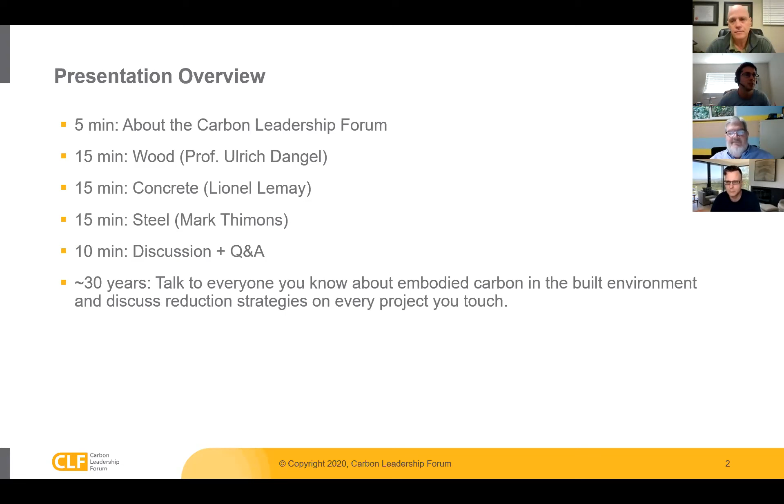About the Carbon Leadership Forum: it was founded about 10 years ago, and it's all about collective action, bringing people together to talk about and address embodied carbon in the built environment. We recognize the impact of buildings is significant. There's research conducted by people in academia and industry, and we develop tools and resources. I'm sure many of you have heard of the EC3 tool - that was an idea incubated in the Carbon Leadership Forum - and we empower collaboration and connect members all around the globe to talk about embodied carbon.

There are local hubs all over the place. Austin is just one of many. I think most people on this call are probably joining from Austin, but those of you who aren't, look for a local hub near you and see if you can get involved and join in.

There's also an online community you can join. If you go to community.carbonleadershipforum.com or .org, there's an online forum where you can ask questions and participate. It's been called kind of the Google search of embodied carbon. There are also a bunch of focus groups. So we have local hubs, an online platform, and focus groups. If there's a particular idea you want to develop or incubate, start getting involved in the Carbon Leadership Forum - this is a great place to start.

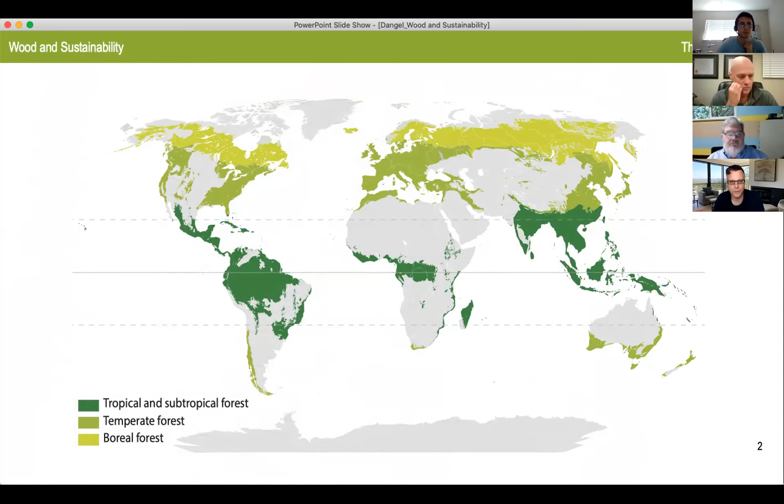Wood itself, or trees themselves, are really amazing things. They take up carbon from the atmosphere and, through sunlight, convert that carbon dioxide and water into carbohydrates for their growth, and simultaneously release oxygen that we all need to breathe and live.

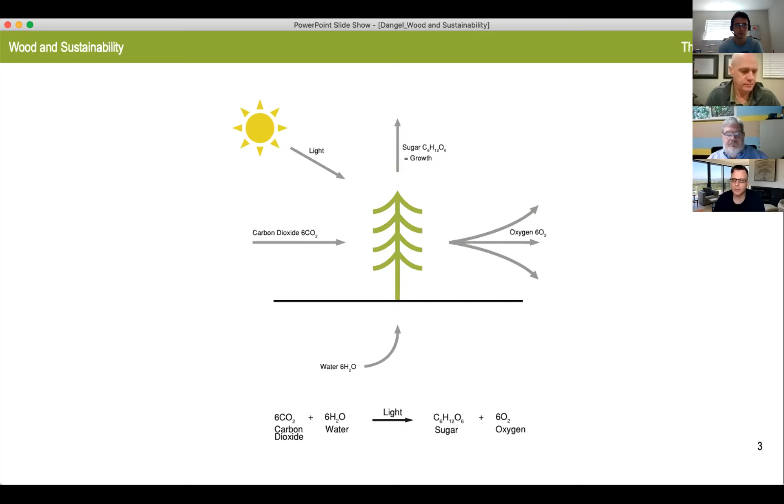You can't have a conversation about wood without talking about deforestation and the concerns around it. If you talk to any layperson, that's the first thing that comes up: aren't you cutting down all the trees?

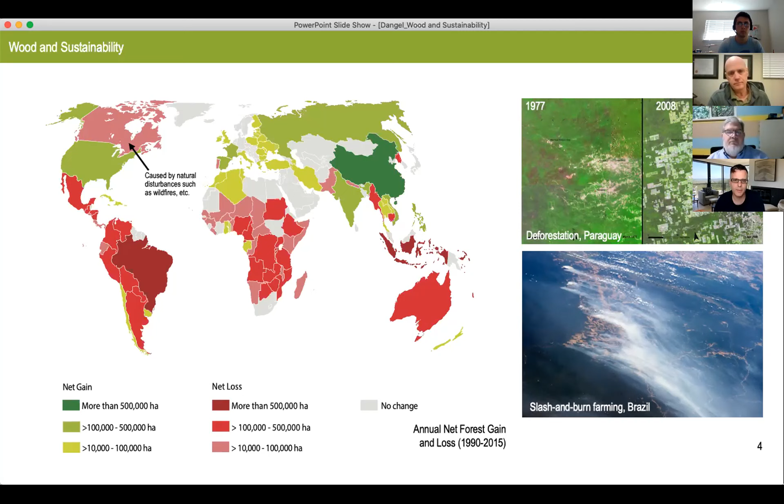So it has to do with other things besides just using wood for construction. That said, we still have to be mindful of where that wood comes from, and I'm an advocate for sourcing materials that come from sustainably managed sources. Wood is the only structural material that has third-party certification programs verifying that the product originates from a responsibly managed source.

In the Northern Hemisphere, Europe has been managing its forests sustainably for over 400 years. In North America, we're probably about 200 years in. Here, about 30% of our forests are certified by FSC or PEFC, and that doesn't even include federally managed forests that are sustainably managed but don't fall into a certification program. So I'm an advocate for using wood, but also for using wood from sustainable sources we can trace.

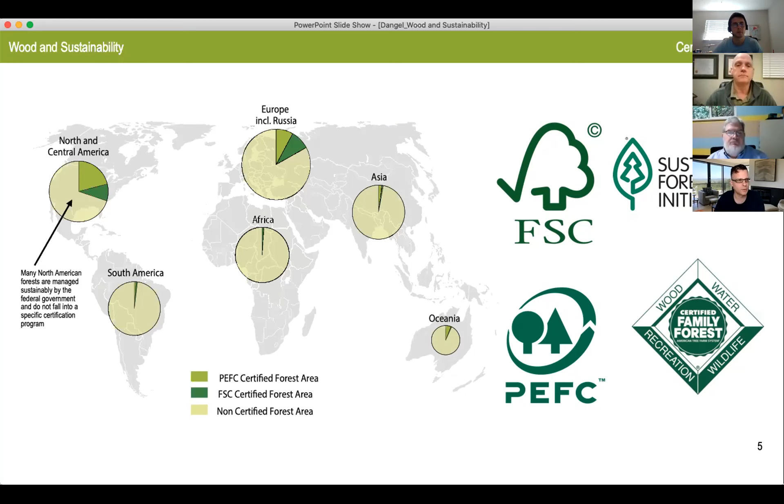Really, the great opportunity for using wood is capturing the atmospheric carbon trees absorb as they grow. As forests mature, that tops out, and older, more mature trees absorb carbon much more slowly. So there's an opportunity to take out the mature growth and allow new growth to follow, then convert that wood—which at that point is 50% carbon—into long-lived wood products that store that carbon, using them to build our buildings and cities, turning our buildings into long-term carbon sinks.

At the end of that building's service life, the wood will only release as much carbon back into the atmosphere as the tree absorbed during its lifetime, whether through incineration or rotting and decay.

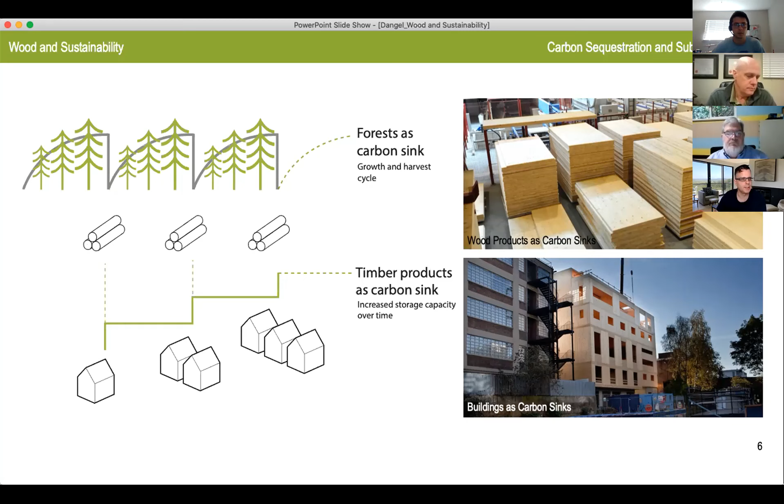The wood industry has been pretty good about efficiently processing wood from the forest. If you look at this chart from the 1940s, roughly half of a trunk was wasted, incinerated, or landfilled. Today, the wood industry effectively uses 99% of the trunk, some in the form of residues used for biofuels to provide their own energy. As long as that comes from sustainably managed forests, that's a carbon-neutral energy source.

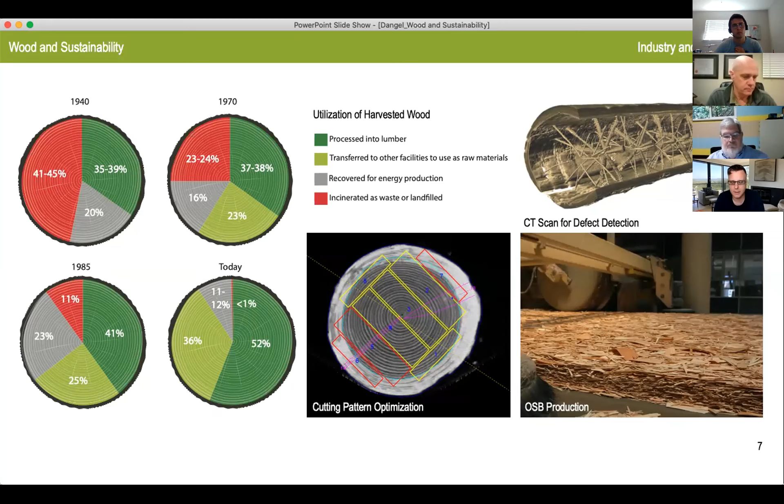Many green building systems increasingly rely on performance-based evaluation of building materials, assemblies, and entire buildings through life cycle assessment, whereas initially wood was more recognized in a prescriptive category. That's where environmental product declarations, or EPDs, have increased in importance, and many rating systems have started to recognize them. EPDs are independently verified reports on the environmental performance of products, based on life cycle assessment, with worldwide validity because they conform to ISO standards.

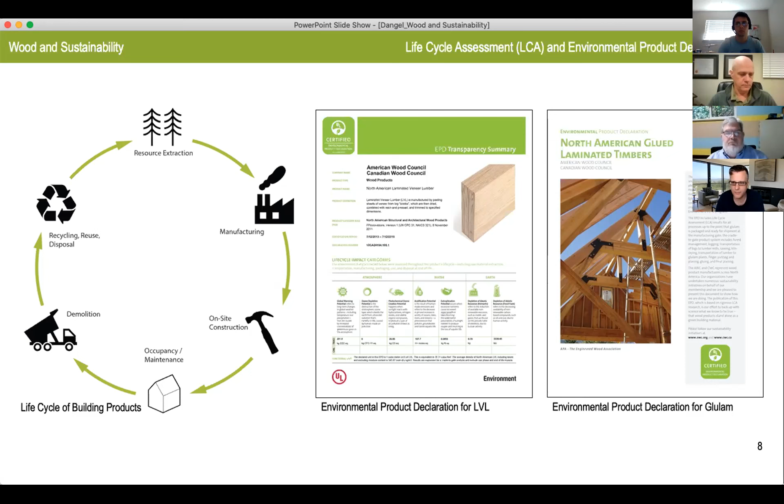So it's like the nutritional label on your food—you can quickly compare different products against each other and see which one you might prefer based on its environmental performance. The wood industry, especially in Europe and Asia, has been the leading developer of EPDs, and the North American wood industry is following in its footsteps.

There are a lot of opportunities that have arisen with new technologies. Digital fabrication offers the ability to manufacture wood in a highly customized fashion without significant loss of productivity. Some of that gets lost in formal explorations, which I'm not a particular fan of. I'm really more interested in using these computer-based design and fabrication processes to resolve issues of material use, waste minimization, and structural efficiency, leading to the overall optimization of a structural system.

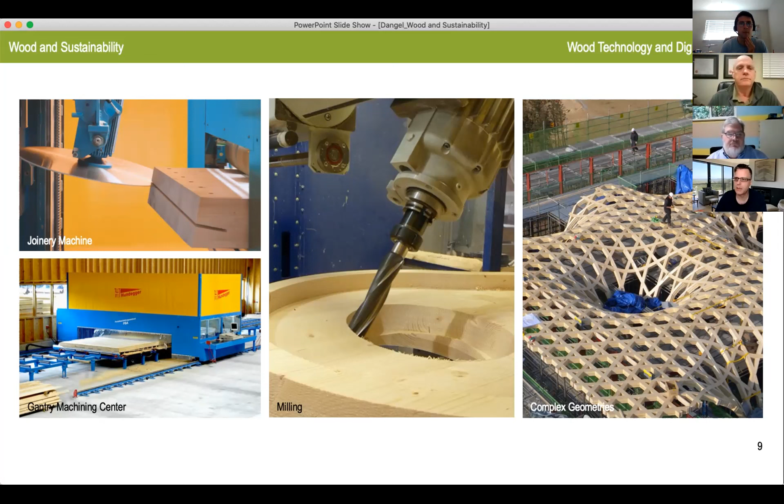Because you're able to create some of these very complex geometries. In the end, it's usually still workers in the field that assemble these in a very labor-intensive process by hand.

Wood also has historically had high levels of prefabrication due to its lightweight. Even going back centuries, carpenters would prefabricate offsite, bring it to the site, and erect structures. That's where the term 'raising a barn' comes from.

Whether that's prefabricated components, entire wall and floor panels, or entire prefabricated spatial modules, prefabrication offers alternatives to conventional building practices, which are often plagued by inclement weather, exceeding budget, chronic delays, and poor quality of construction.

Prefabrication offers the ability for processes to occur simultaneously rather than in a linear fashion. They tend to be less dependent on the weather, and offer dry and safe working conditions, better quality control, and reduced waste on site.

So you're not trucking a lot of raw materials to the site, generating waste that has to be gotten rid of, or landfilled in the worst case. A lot of that waste can be separated and taken care of right there in the workshop.

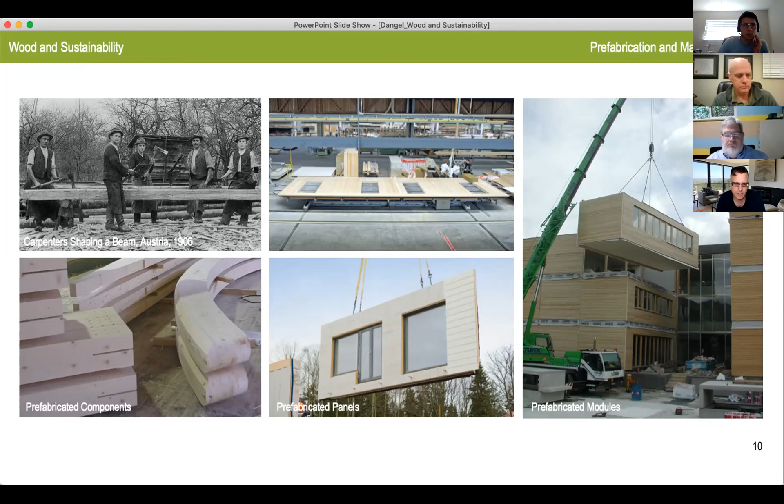Also, reducing the impact on the neighborhoods these buildings are going up in, in terms of noise and interruption, is increasingly relevant. That said, I do like all building materials.

I'm a fan of wood, obviously, but I don't want to use wood simply for the sake of using wood. Let's use it where it makes sense. Wood does play nicely with other materials—even an all-timber building isn't going to get away without using some type of metal connectors.

Let's employ hybrid construction techniques where we can exploit the strength of one material while compensating for the weakness of another, such as using steel for tension and wood for compression, or a concrete podium that keeps the wood dry and allows for larger spans.

Where I see a lot of development happening is in composite systems, where you use two materials together, such as wood-floor concrete systems, taking advantage of concrete's mass for acoustics and fireproofing, and the structural capacities of concrete in compression and wood in tension.

But at the same time, when we look at these composite systems, we have to keep in mind what's going to happen at the end of the service life of these buildings. Like in the top right, you can see this is a...

...mechanical shear connector that connects the precast concrete slab to the wood structure below, ensuring composite action and structural integrity of the system, while also facilitating disassembly at the end of its service life and easy separation into different waste or recycling flows.

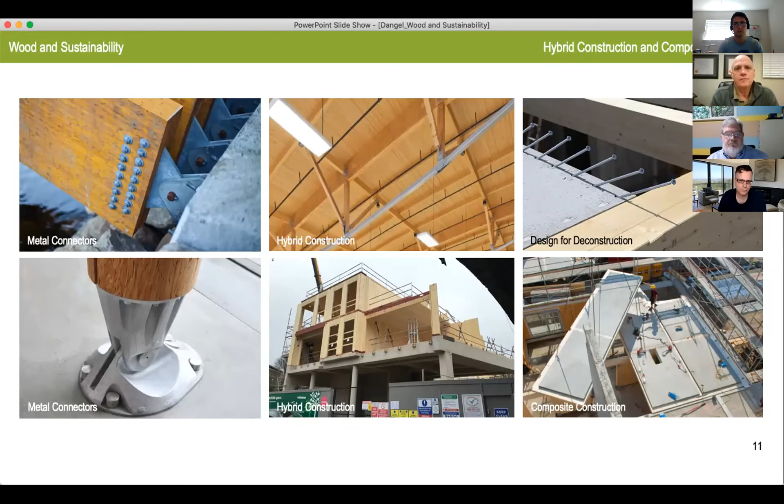We have over half of the world's population living in urban areas now, and by 2050 it's going to be about 70%. Whether in an industrialized nation or an emerging economy, they're all going to have to provide more sustainable and affordable housing.

At the same time, we also need to reduce our carbon footprint. These new mass timber products have the opportunity to build taller and denser, turning our cities into carbon sinks rather than emitters of CO2 emissions.

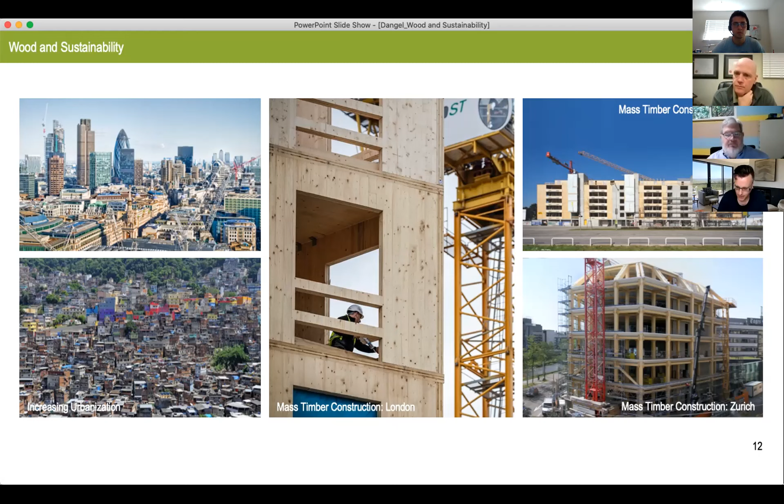Wood is also great for increasing density in these areas, whether that's an infill project minimizing the truckloads of materials that go in, and reducing the noise impact and disruption on the neighborhood.

Also increasingly important in these inner-city environments are fine particulate emissions, which you can reduce with high levels of prefabrication.

Also taking advantage of the significant structural reserves of some of our steel, concrete, and masonry structures through rooftop additions. This example, second to the left, is a two-story 1960s housing development that received a two-story wood addition, effectively more than doubling the livable space.

And taking advantage of the embodied energy of the materials that are already there. Lastly, we also have building stock from the 1950s to the 1980s where the envelope has reached the end of its service life, but the structure is totally fine, and there's no reason to tear them down.

So increasing the thermal properties of the envelope by recladding with highly insulated prefabricated panels—a process that often happens while the buildings are fully occupied—increasing the lifespan of the structure and preserving the embodied energy that went into it over 50 years ago.

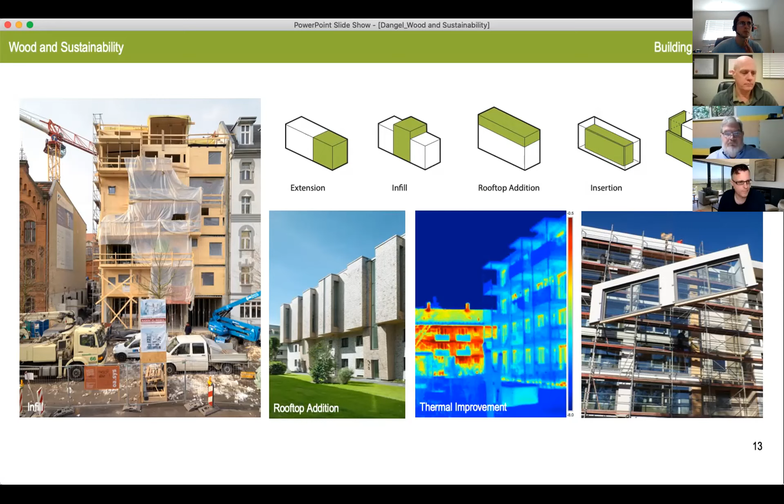Lastly, I want to close with that slide in terms of the potential for wood. I think these mass timber products have opened up manufacturing prospects and added value potential for a lot of rural regions that have abundant timber resources, creating well-paying jobs and connecting them with the urban communities that will actually consume their products.

Also, continued research into all-wood products, reducing the number of metal fasteners or alien materials that might make it hard to repurpose and recycle at end of service life. There's also significant potential in using hardwoods structurally. Virtually all of our wood used in structural applications is softwood, but there's a large number of hardwoods in our forests not being put to higher use.

Then the Achilles heel obviously for the wood industry are the adhesives, which are still heavily reliant on petroleum-based products. But there's a lot of research going on in bio-based adhesives or other forms of bonding technologies such as friction welding. And the steel and concrete industries, over the last 50 or 100 years, have been able to get a good system down that has been standardized, whereas the wood industry, and mass timber specifically, is still really in its infancy.

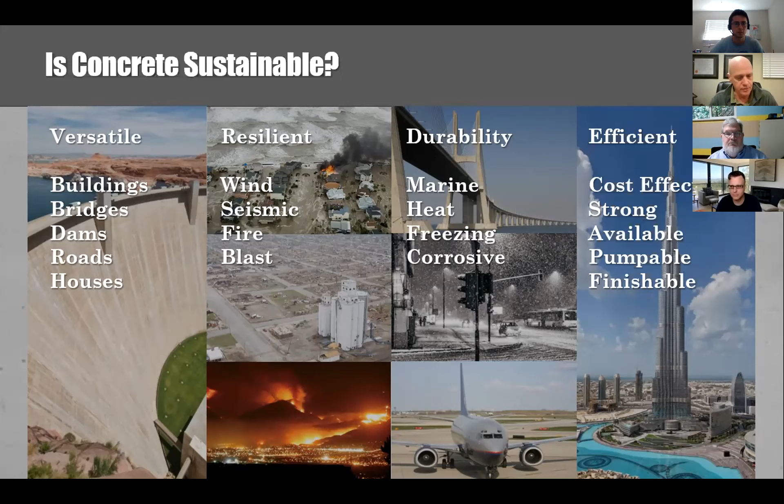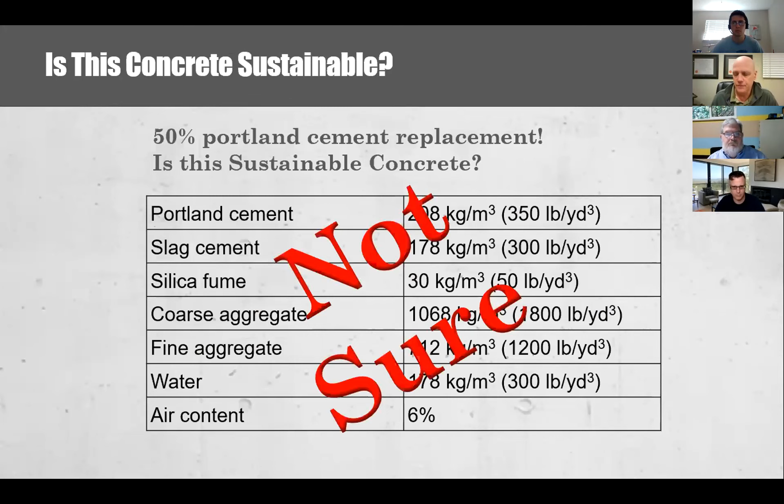But I'm going to suggest that maybe we're not sure, because there are so many applications for concrete, and so many fairly rigorous needs from both the owner side, architect, engineers, and contractor side, that you have to really make sure you understand what the use for that concrete is.

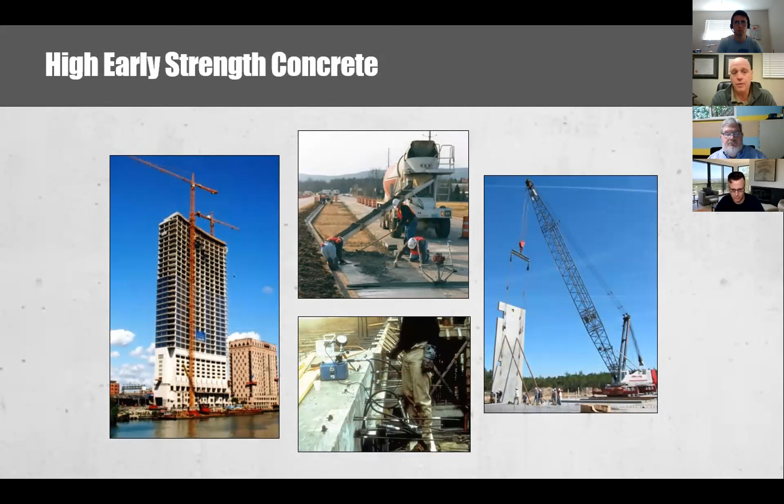So, for example, if you have high early strength concrete, perhaps 50% replacement is too high for that particular application, whether you're turning forms, post-tensioning, trying to open a road very quickly, or lifting tilt-up panels, or whatever the case. So you probably couldn't do it with 50% replacement. You really have to think about it.

When it comes to mass concrete, 50% replacement might not be enough. So you would not have a durable concrete that could control the heat of hydration during the placement of these mass concrete elements. And so that mix design that I showed you, that most people would say is a sustainable mix design, may not be, in fact, meeting all the performance criteria.

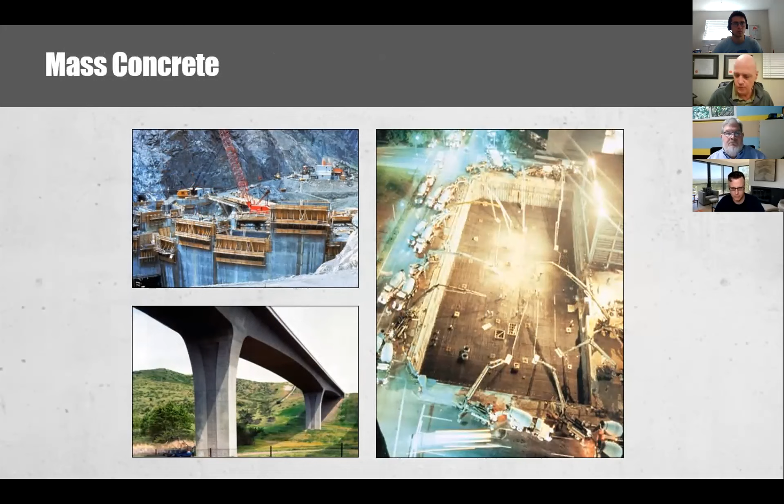The point I'm trying to make is, what's a sustainable structure? Well, it has to meet all the traditional performance requirements of the owner and the design team and contractors. For example, strength, durability, fire resistance. It has to be quiet for buildings. It has to be economical, easy to build. But now, in the last couple of decades, we're now focused also on this additional criteria, which is minimizing carbon footprint. So let me explain how the concrete industry is trying to meet that challenge.

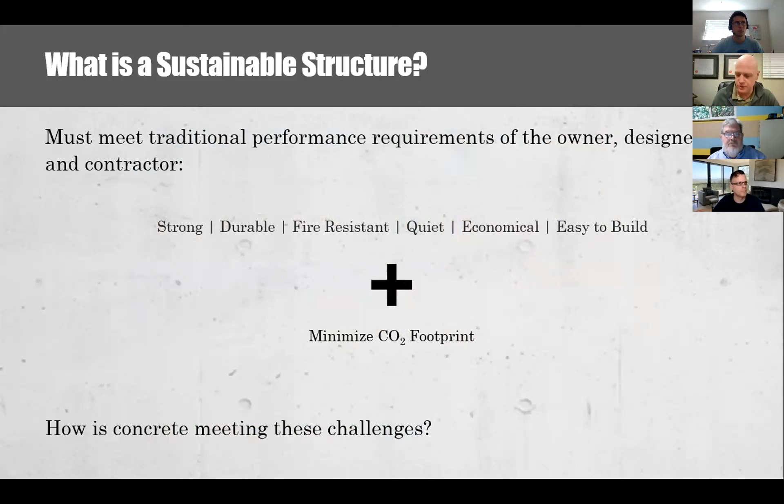Just a few milestones. I would say back in the mid-2000s, not to say that the industry wasn't moving towards more sustainable structures before then, but our association really focused on this in 2006, where we launched a conference specifically focused on trying to reduce carbon footprint, bringing all stakeholders together, exchange ideas, and see if we couldn't develop a pathway to more sustainable concrete.

In 2009, we actually adopted a set of strategies to get there. And there were many different goals in there, but in terms of carbon, it was to reduce carbon footprint by 30% by the year 2030.

We established the MIT Concrete Sustainability Hub through our sister organization, the RMC Research & Education Foundation, with the main focus of trying to develop measurement criteria and processes to get to lower carbon concrete. Life cycle assessment really was the main measurement tool that we all decided on, that this would be the way to measure our progress towards more sustainable concrete.

We also developed at the time what was called the Sustainable Concrete Plant Guideline, which was the basis for certification, much like FSC, very rigorous set of standards. Now, I would say that we were probably ahead of time, because at the time, really, there was no demand for any sort of a certification for the manufacture of concrete. And really, it never really went anywhere, because certification, the only way a certification is successful is if there's demand for it. I'll get back to that near the end of my presentation.

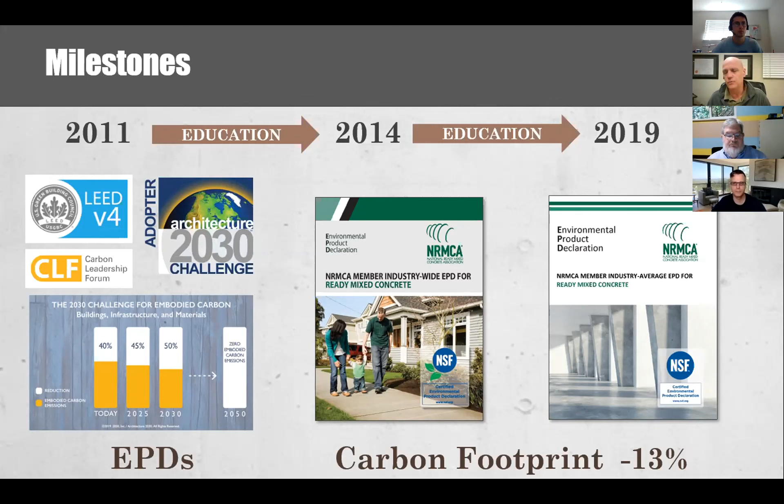I think what's going to happen is it's a vocal minority, and eventually that's going to grow, so we have to be cognizant of that. And I think as a result, we're going to see significant reduction in carbon footprint, because all these buildings that have concrete in them will have that goal and thus have reduced carbon footprint.

Well, we've been doing a lot, as you notice, there's a lot of education involved. And the latest piece of education we're really pushing is this idea of a top 10 list for reducing concrete's carbon footprint. I can't go through it all today, it's a 1-hour presentation, happy to do it at a later date. But I'm just going to point out a few things - if you're not doing this, you're really not serious about carbon footprint reduction. Number 4: using alternative cements.

I don't know if all of you know about blended cements. These are alternatives to Portland cement. Basically they are Portland cement combined with other materials. The most popular one is simply called Portland limestone cement. It has 15% limestone interground with Portland cement. It performs exactly like Portland cement, and you can still use all the other methodologies for reducing carbon footprint.

If your spec doesn't permit the use of blended cements, ASTM C595 - take note of that. Go back and look at your spec, because I know all of you love looking at specs. Go back and look at your spec and see if you permit ASTM C595 in there. If not, do it today, because right off the top, you'll reduce concrete's carbon footprint by 10% and get the same performance. Who can argue with that?

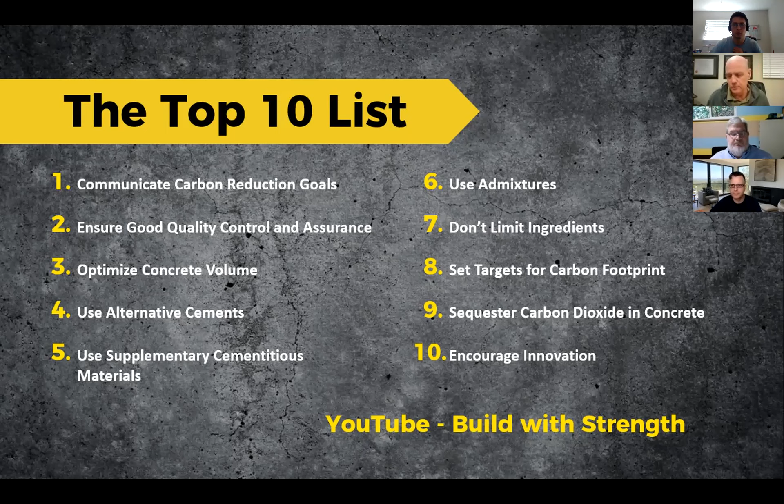Anyway, there are plenty of other things here that you can do, and you can go to YouTube, to the Build with Strength channel, and watch a short - well, not that short, it's 20 minutes long - that talks about these top 10 ways.

The future, 2020, that's where we're at now. Ed Mazria and the Architecture 2030 Challenge actually changed the goalpost on us just recently. They said we have to actually get to zero by 2040, not 2050. That's okay. I think we can do it. There's so many things going on in the concrete industry that will help us get there.

We did launch again our concrete sustainability conference, retitled Global Concrete Summit, only because we can reach the globe now that we're all online. We're behind the SE 2050 challenge, and I'm proud to say that our industry has over 33,000 concrete EPDs - so 33,000 products have environmental product declarations entered into the EC3 tool, which is great.

In terms of 2030 and beyond, very recently, the Global Cement and Concrete Association, which has over 40 cement and concrete companies that belong to it, announced that they have a 2050 zero carbon footprint goal.

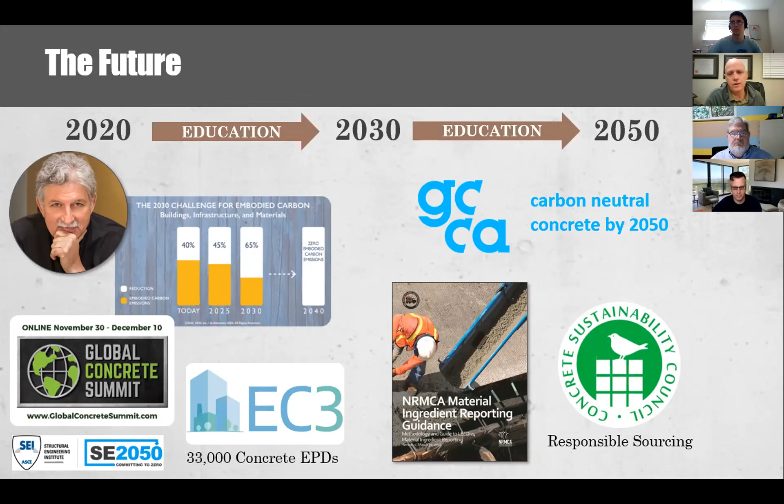A couple other things to point out. We are prepared as an industry to address things like material ingredient disclosure. We do have a report that will do that. We also took that document I showed you earlier on responsible sourcing, and we developed a worldwide responsible sourcing scheme called Concrete Sustainability Council. So again, the demand for it here is relatively low, but we're ready when the demand does start.

In terms of how we're going to get to zero carbon concrete, it's really about innovation. There are an incredible number of companies out there working on really innovative ways to reduce concrete's carbon footprint. Number one, again, Portland limestone cement - if you're not using that, you're not serious about lowering concrete's carbon footprint. But just a few other things I think that's really exciting.

Things like harvesting fly ash. There's 1.5 billion tons of fly ash buried in the ground. Why is that? Well, we've been burning coal to generate electricity for over 100 years, and we've only been using fly ash in concrete for the last 40. Honestly, even today, not all of it's being used every year that's being produced by coal power generation plants, so some of that is still going in the ground.

This is sad. Anyway, companies are beginning to look at those landfills and harvesting fly ash and using it in concrete. So I would say that's a big deal.

I think in terms of construction, Uli pointed out this idea of being more efficient. Things like self-consolidating concrete, 3D printing is super exciting, and things like fiber reinforced concrete. The idea of having to place reinforcing in concrete and making it a three-step process - building a form, installing the reinforcing, and then placing the concrete - if you can do it all at once, including not even having formwork, so 3D printing with fiber reinforced concrete, end of story, no other additional finishes, nothing. You got a fire resistant, resilient structure that could be incredibly attractive. Still a long way to go on the 3D printing side, but I think it's promising.

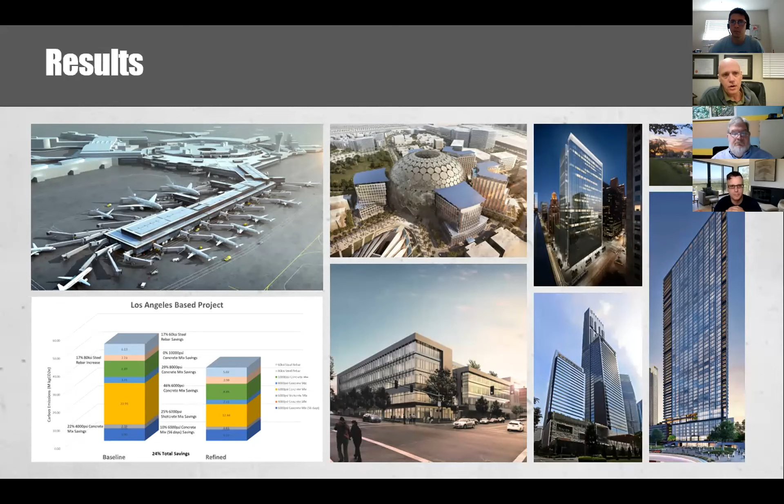There are some other innovations, just don't have time to go through them all today, and the results are fantastic, right? So companies like Walter P. Moore and other structural engineers and architects are using the data that we've been able to develop over time to actually demonstrate lower carbon footprint. All these buildings used the LCA methodology to demonstrate that they had a lower carbon footprint. And of course there are hundreds more, but these are some of the more impressive ones that are published. Very proud of the fact that the data is there for structural engineers and architects to use to measure concrete's progress towards a lower carbon footprint. Thank you.

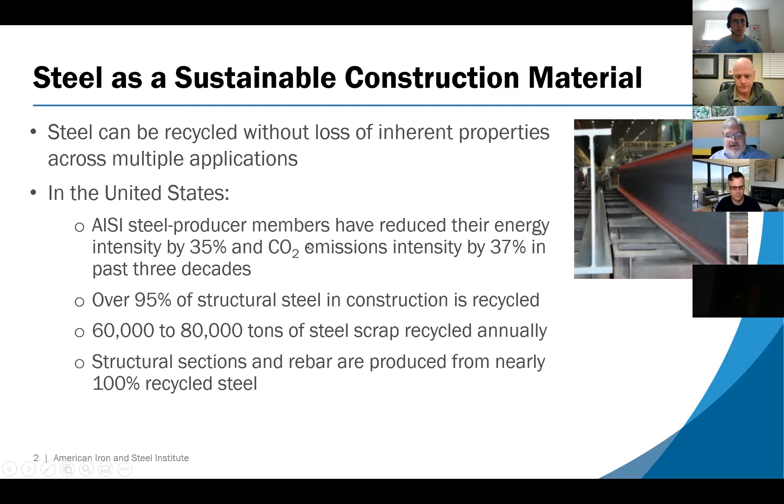And the numbers are really substantial. In a given year, just in the US, somewhere between 60,000 and 80,000 tons of steel is recycled every year. The last year for which we have good data, I believe the number was about 67,000 tons of steel recycled. And because of that, some products, especially construction products like structural steel and rebar, are produced with near 100% recycled content.

So in today's sustainability climate, it's important that the users of steel or any product have the information that they need to make sustainable design decisions. Our industry is proud of the fact that we have available a significant number of industry-wide EPDs for nearly all steel construction products, not just framing, but things like steel decking, steel joists, steel doors, all those sorts of things. And more of those companies are producing their own producer-specific EPDs as well. Lionel mentioned the PCR - we also have a PCR for steel products. In fact, we just completed the 5-year renewal of that PCR, so there's a new version as of just a month or two ago.

We are also just about ready to release new life cycle inventory data for steel products. These are semi-finished steel products at the coil level, one exception being structural sections, which has its own set of data. This is important for anyone doing a life cycle assessment study that includes steel. The most recent data on steel production in North America will be available, I hope, by mid-November.

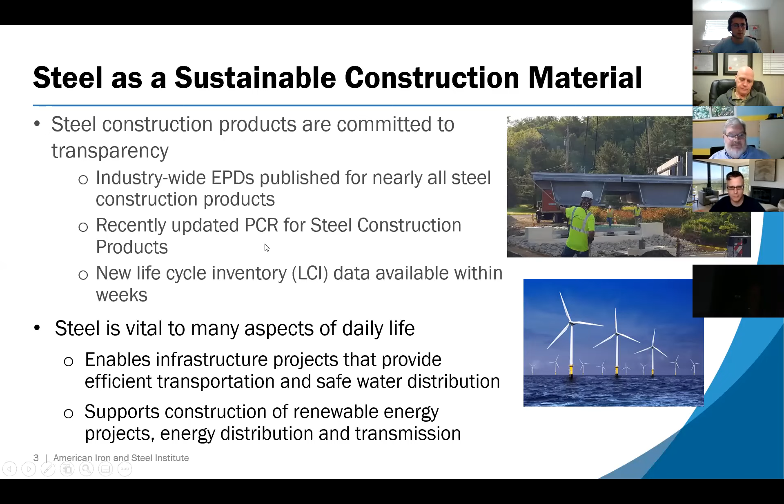It's important to point out, if it isn't obvious, that steel is just kind of everywhere. It's vital to a lot of aspects of what we do every day, and maybe most importantly to renewable energy projects. The wind towers that are becoming more and more common - not the blades, but the towers - are made out of steel, and some of them are quite gigantic.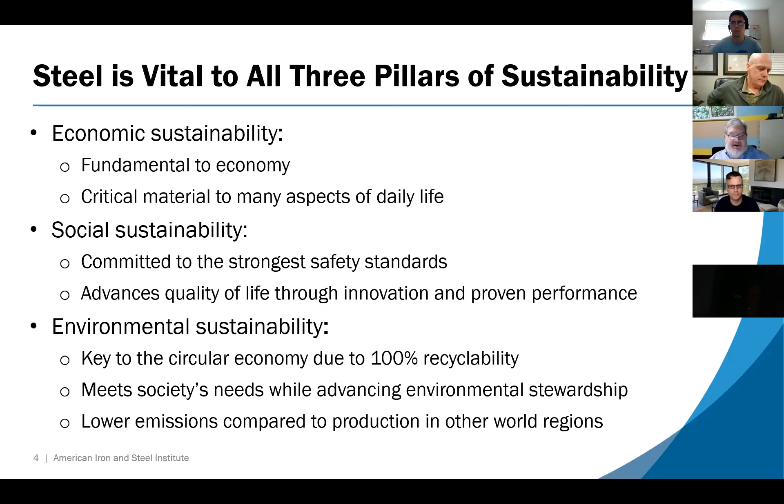Also important to point out that it's not just environmental. That's what gets the most attention, and possibly for good reason, but there are two other aspects to sustainability that are important as well. Steel is critical to a lot of aspects of daily life - things like safety standards, which are very stringent and taken very seriously here in the U.S., maybe not so much in some other parts of the world, but important as well.

This concept of the circular economy is getting a lot more attention. There's a relatively new but very active ISO technical committee that deals specifically with circular economy - how to measure it, how to define it. We feel steel is a natural fit for the circular economy, not just because of the recycling aspect, but also because it's a durable, long-lasting product, especially in construction. It can be designed to be very flexible, and designed for easy disassembly so that as building occupancies change, the building can change to meet those needs without starting from scratch.

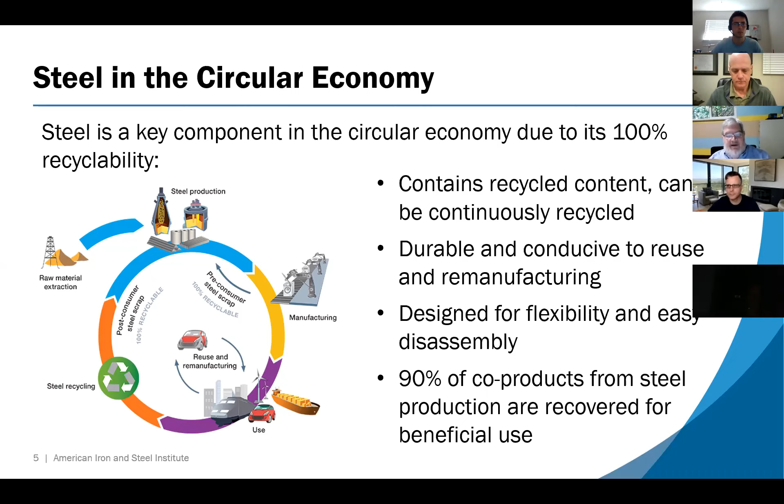One other point to make is that the co-products from steel production - any production process has co-products - and in steel, the vast majority of those have found other uses, whether it's processed gases used for heat, usually in the same facility, or products like slag, which is very common and often used in concrete construction, as road beds, or even as fertilizer products.

If there's one thing I could leave with you today as most important from a construction standpoint when steel is used, it's to understand that the steel produced in the U.S. - and this is pretty much the same in Canada and Mexico, so North America overall - has an emissions intensity lower than any other major steel producing country. These are the 7 largest steel producing countries, and as you can see, in some cases, dramatically lower.

So if you were to construct a primarily steel-framed building, and that steel was sourced from, say, India, versus sourced in North America, you start at a distinct disadvantage from an emissions standpoint. It tends to get into a political discussion, which I prefer strongly not to do, but it's just a fact. This is an independent study, by the way, that we had nothing to do with. This data is readily available.

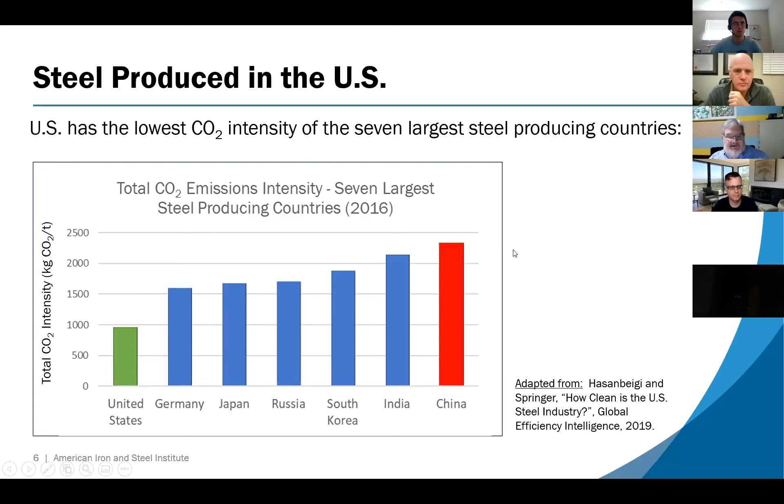The steel industry, of course, doesn't stop there. As far as the future, there's a significant amount of research ongoing, both by AISI as an association and individually by its members, both in North America, which is the region we represent, but also globally. I won't go through all of those, but there are several types of projects being considered, most of which are in process in some way, either demonstration projects or some beyond demonstration projects.

One of the ones that seems to have the most potential is the idea of using hydrogen as a reduction agent to produce iron - essentially to reduce iron ore to a usable form of iron in steel production. That's done typically right now in a blast furnace, but it can be done using hydrogen.

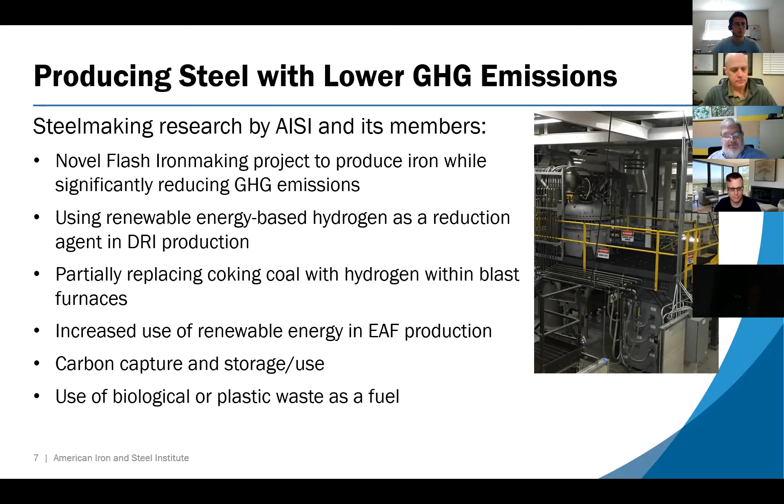If that hydrogen is produced using renewable energy, it becomes a significantly reduced carbon profile for the steel that is produced in that manner. One of the other, maybe more obvious, options for reducing the footprint of steel in electric arc furnace production, where electricity is the primary energy source, is the increased use of renewable energy. That's something getting a lot of attention and beginning to be implemented.

Some examples: SSAB in Iowa, Nucor at a new plant in Missouri, and Evraz in Colorado are using renewable energy sources—two of them wind-based and one solar-based—to provide all or nearly all of the electricity needs of these facilities. That's a development that's really exciting.

The other thing I'll mention is brand new, just announced last month: an example of carbon capture in a blast furnace application. The Department of Energy awarded funding to ArcelorMittal at their plant in Burns Harbor, Indiana, to do a pilot project that would result in capturing the CO2 produced at their blast furnace. That's an exciting development as well.

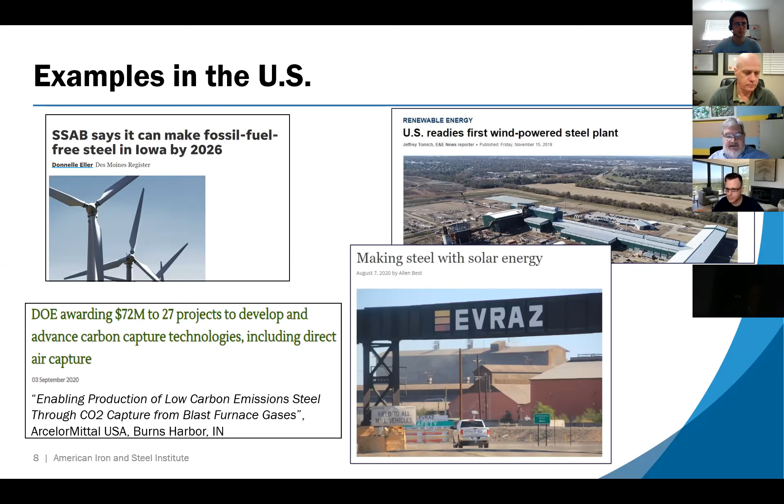So that's been a very brief introduction to steel as a sustainable material. Hopefully that allows time for questions. In summary, yes, steel is everywhere. The fact that it's highly recyclable and that it lasts for a long time makes it a good fit for the circular economy.

And as I pointed out, U.S.-produced steel, North American-produced steel, has one of the lowest emissions intensities in the world, to the point where I typically tell architects that one of the first and most sustainable decisions that can be made, if a building is going to be primarily a steel building, is to ensure that the steel is sourced from American sources.